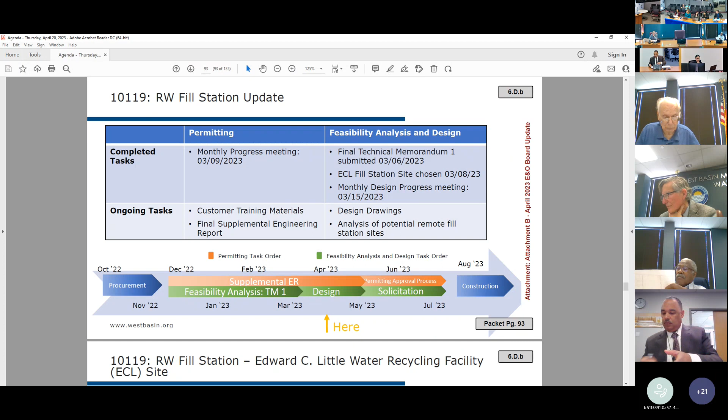So far, just to remind you, this fill station has two components: the permitting component, which is mostly composed of submitting a supplemental engineering report to get regulatory approval to operate the fill station, and the second component, which is the feasibility analysis and design.

This past month and a half, we've worked with our consultants, Woodard and Curran, on a monthly progress meeting, and they are currently working on providing the final supplemental engineering report. In order for them to do so, we've also been drafting the customer training materials. For the feasibility analysis and design components, we received the final technical memorandum 1 from our consultant Tetra Tech in early March.

As a staff and team, we were able to get together and decide upon the ECL fill station site right after, and we also had a progress meeting with the same consultants. They are currently working on the 100% design drawings, and we just received the 70% design drawings last week.

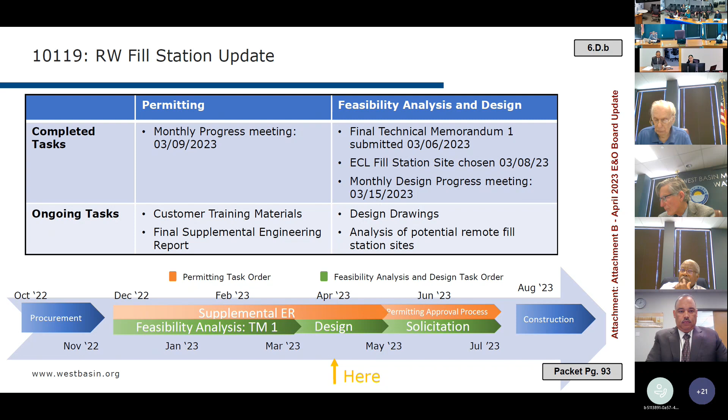And internally, we are also working on the analysis of the potential remote fill station site. On packet page 94, I could go into a little more detail about why we chose the site that we did at ECL.

Based on the technical memorandum 1 recommendation provided by Tetra Tech, we wanted to go with location 3, which is located in the east parking lot of the visitor center, shown in the picture on your left. With this location, we are deciding to connect to the existing irrigation system via a 1-inch quick coupler valve. The main reason for this is based on the board's urgent request to implement this project quickly, so we're going with this specific site.

It is the lowest cost, because the least amount of equipment is needed, and it also minimizes the schedule since not much construction is required. Another reason for selecting the site is because it is very close to the restrooms, allowing ease of access for customers as well as staff operating the fill station. Again, since it requires a very simple design, it minimizes the equipment needed.

We are going to utilize existing vendors to purchase that equipment. This site also allows for more space, so in the future, if we want to add another hose dispenser, or even expand into a new recycled water meter with a higher flow rate, there's opportunity to do that as well.

So the overall cost to implement the fill station at this site is about $4,500, and that includes the quick coupler, a sub meter, a hose cabinet, and some contingency.

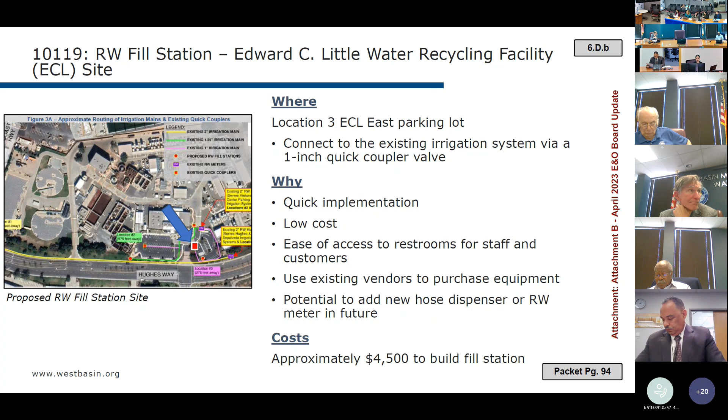On packet page 95, you will see the 70% design drawings. These just came in, so I wanted to quickly show you that Tetra Tech has been working on them and was able to submit it, so we are in the process of reviewing. You can see on the left where that quick coupler will be located. It is 1-inch, and provides about 15 gallons per minute flow rate.

You'll also see that a new recycled water sign will have to go in adjacent to it, which is a regulatory requirement. We will also use the adjacent customer parking spots for the fill station customers. On the right, you see details that were provided, mostly regarding the warnings for recycled water signs, as well as how the existing coupler currently looks.

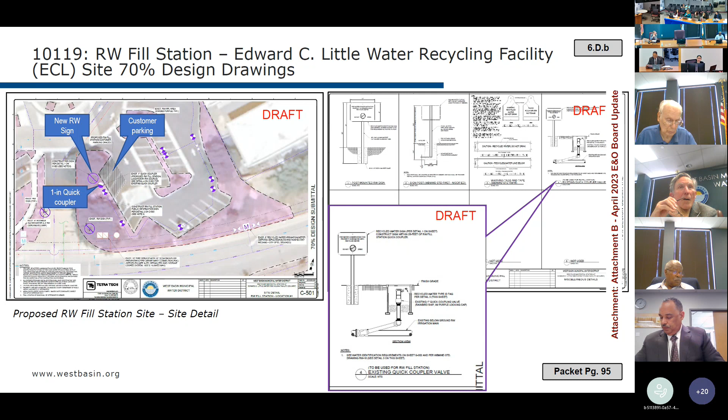So on packet page 96, you will see the customer training materials. As I mentioned, these are required, and we need each customer to either read, sign, or acknowledge that they have read through all of these different documents.

I wanted to highlight the documents we've been working on, starting with the user agreement application. That is basically a document that has the customer acknowledge and become aware of the risks they are taking when they use this fill station water, shown on the right.

The 'What to Know About Recycled Water' fact sheet also provides further information about the fill station program, who's eligible, the procedures needed to use the fill station, and the understanding that the water is very heavy, so they need to acknowledge that the vehicle they're bringing in will have a lot of added weight.

Participant training is another element to provide further safety guidance on what recycled water is and how to properly and safely handle it, and where it can be used. Lastly, recycled water identification stickers need to go on all the containers carrying recycled water, shown on the screen, so that those containers are properly marked.

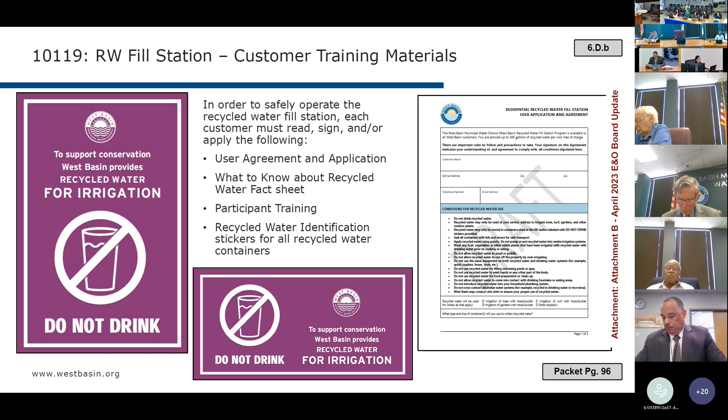On the next page, you'll see the other component of this project: potentially looking at another remote site to put a fill station somewhere within our customer service area. To determine the most feasible site, we prepared an analysis looking at potential sites located in the cities of Carson, Gardena, Inglewood, Lawndale, Torrance, and Palos Verdes Estates. So far we've identified 25 sites.

For each of these sites, we developed criteria to analyze the potential feasibility to host a site. You'll see the different criteria listed, which identify the location - whether or not it's in the district service area, if it's a West Basin facility, and also who the water purveyor is, because that's important when we want to.

The other criteria is site accessibility, so we're looking at how close to our existing distribution system it's located. I was able to work with our GIS staff to map out our entire existing distribution system, shown in the purple line in the image, and also create a buffer zone about 300 feet to know how far out we could potentially connect to.

We also want to look at whether or not that site is fenced or open, and then if there's room for parking and queuing, so if there are customers interested and there's a lot at one time, we want to make sure they're safe to queue. And then we also want to see restroom accessibility, if there's any available for the public to use.

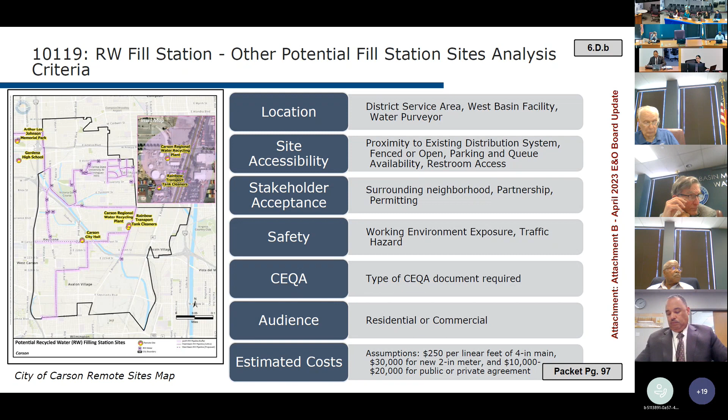To help you better understand this, this is a map of the city of Carson, and we highlighted about 3 potential sites there. But on the next packet, page 98, I can walk you through a quick example of one of the sites we've looked at—that is in the city of Torrance, our Torrance Booster Pump Station site.

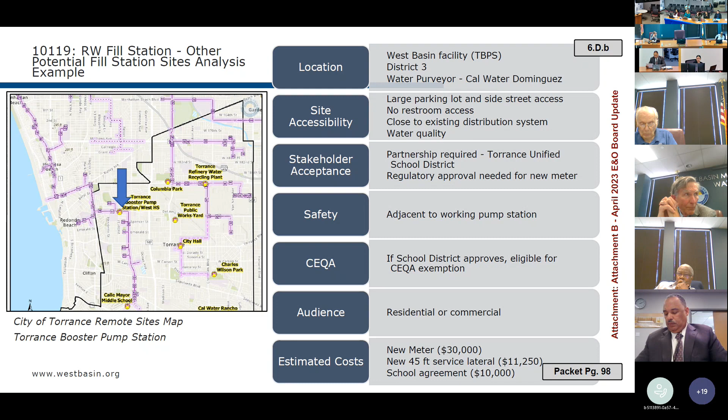Lastly, we estimated costs, knowing that a new meter would have to be implemented, as well as the lateral and the school at this specific site. On the next slide, you'll see that we are looking forward to submitting our supplemental ER next month.

We are also working with Tetra Tech to develop 100% design drawings. Per Division of Drinking Water's recommendation, they told us to notify our customer retailers of this upcoming fill station, so they're aware we're opening up to all of our customers, which will enhance their options.

Lastly, we are continuing to seek partnership opportunities for the remote fill station sites. In June, we are hoping to go out for construction solicitation. The caveat is, with the simple design we currently have, we may not need to go out for bid, because we can use our existing vendors to purchase all the equipment and essentially assemble it.

Lastly, in July, depending on when we get regulatory approval—we're hoping it's 2 to 3 months—we'll get approval from the Water Resources Control Board, Division of Drinking Water, the LA Regional Water Quality Control Board, and lastly we'll work with the Department of Public Health to get that. So in July, we're hoping to construct as well as operate.

And with that, that concludes my presentation on this update. If you have any questions, I'm happy to answer them. Well, thank you very much.

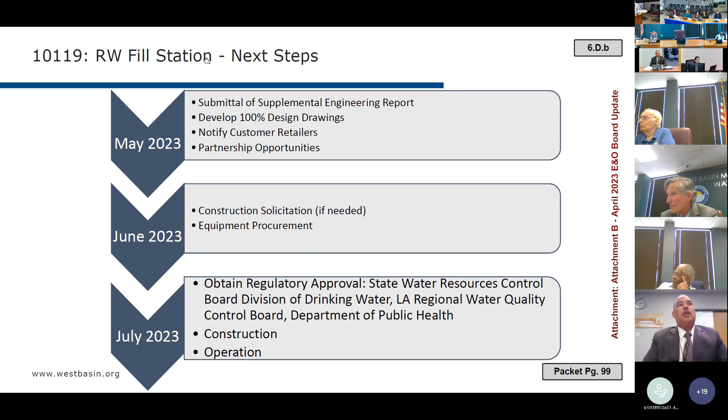If I may add—yes, thank you, Camille, for doing such a great job with this presentation. I think Camille did a great job walking through one of the sites being evaluated, other than ECL. But there's a range of sites we're looking at, not just that one, because we want to make sure all the eligibility and evaluation criteria are compared so we select the best of the sites. It just so happens the one Camille picked was one of the 3 locations the committee had asked us to look into, and that's perhaps why you picked that one to elaborate on.

To clarify, we did look at 3 sites, including Lago Seco Park, Torrance Refinery, and the JMM Carson plant—those were the 3 sites indicated by the board last fall. Torrance Booster was an additional one because it's a West Basin facility we wanted to look at. Oh, that is not the Lago Seco Park? No, I thought that was the one. Okay, well, we're looking at a range of sites—within cities, buildings, parks, and schools mostly.

Basically, we want to collaborate on the best way to implement this. So is it safe to say we'll come back to the committee with a set of recommendations once the evaluation of all the sites has been completed? Okay.

Dr. Williams: Nothing's ever easy. No, it's not. We thought we would have been done a long time ago with this.

I have nothing more to say, but if you're doing the right thing, that's because we don't want to pay for it for other reasons down the road. Thank you, that's all I have.

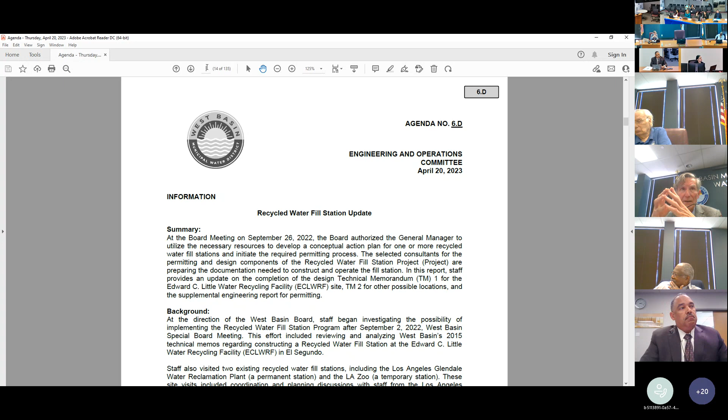Not expanding this. And the other thing is, let's be honest, this is an opportunity for the community to use it. A lot of the users will probably be more of the commercial landscape companies that service industrial commercial facilities, as well as the larger residential complexes and homeowner associations. There will be some private parties that will also come, and they will more than likely come on the weekends to use it. But the bigger users are gonna be the commercial landscaping companies.

So I don't think that we have that big a population of users, so the investment in it ought to be measured. We ought to be really thinking about that, and maybe we look at how much usage we get at the first facility we would install at the Ed.C. Little, which is pretty straightforward installation. And if there's a tremendous demand, then obviously we can revisit that, but otherwise I think we ought to be very measured in looking at how much money we're gonna spend providing these facilities.

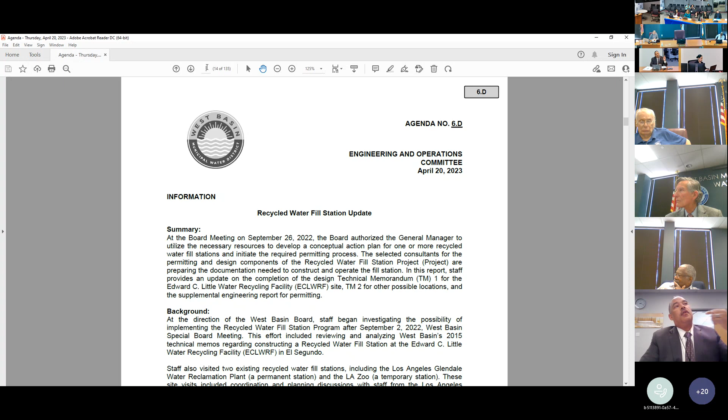That makes sense. We could see how ECL performs, and if you get an overwhelming response, then maybe the board would like to make it more convenient depending on the geographic reach. See where the demand is coming from. Is it coming from the South Bay? Is it coming from the easterly part of the district? Is it coming from the north part of the district? And then we can be more focused.

Chris, thank you for all of that feedback. All right, well, thank you very much.

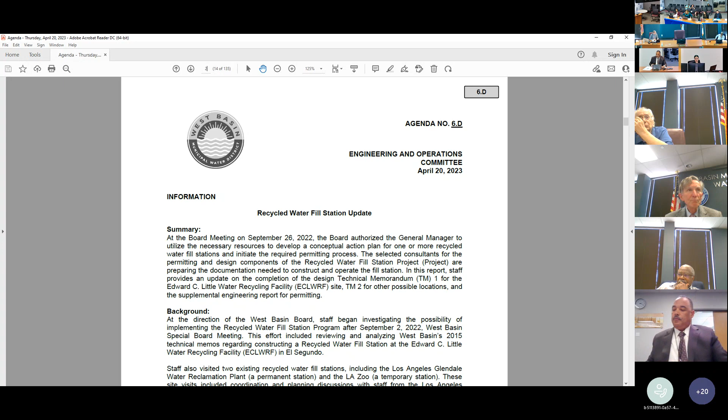Moving on, then our next report is the monthly operations report. We'll go back to Uzi for that report. So Uzi, please.

Highlights on here, we changed the format a little of the memo, so I welcome everybody who's gonna look at some of the operational summary from this last month. Barrier production was kept down. We have ramped it up, but there was between 4 to 5 MGD due to some of the input water quality issues we had and membrane replacement. I'm sorry, page 100 is a large part of the issue.

So from the beginning, page 100 is where I'm starting on the summary, packet page 1. So with these highlighted bullets, we did just get a call, and I recognize this as a reflection back. We got a call yesterday, which we appreciate that there's communication from Hyperion. They lost their oxygen system. They did prepare us that we would see an upset.

Now we're prepared a little more. So we do have thresholds of when we start bringing down certain operations to protect the equipment, how we operate, notify the county. So far, we're doing okay. It's hovering like 20 NTU. We talked to them as well today, but I bring that up because now we have a protocol.

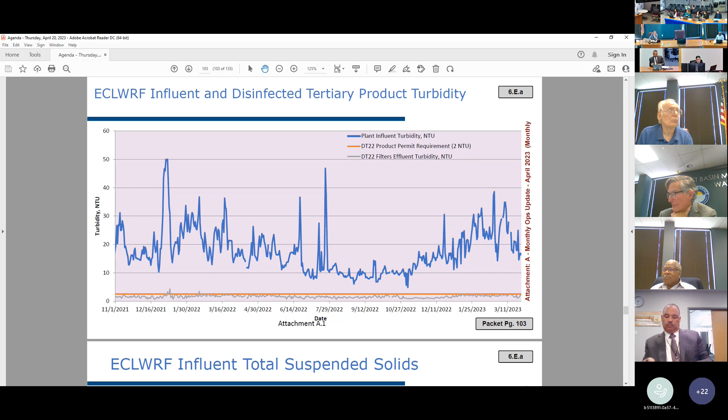Okay, just one of the first—and if I may, we also have the report that was requested for potable sales deliveries and recycled water deliveries. It's also attached. Okay, thank you. Follows what is in. Yep, thank you.

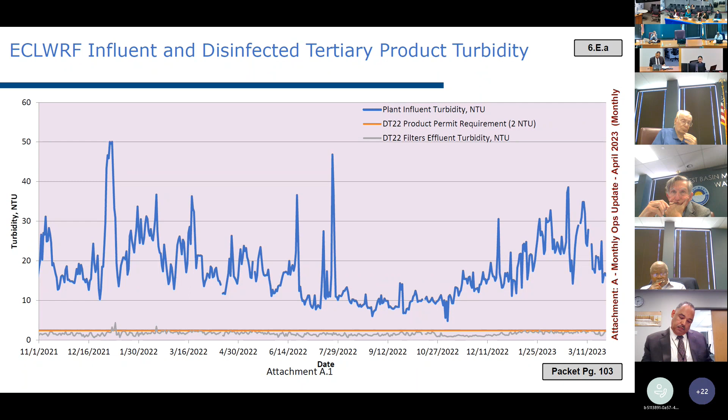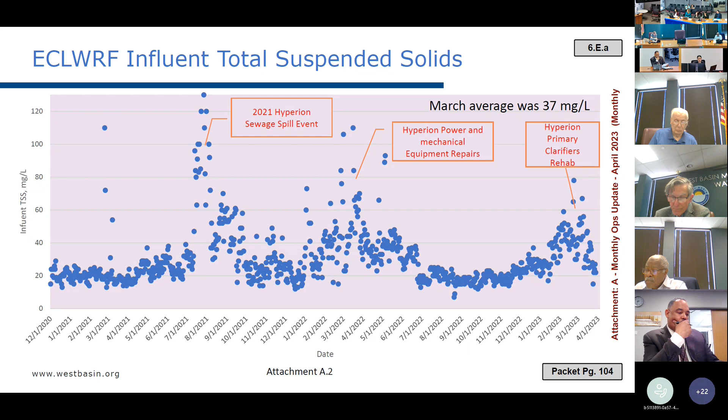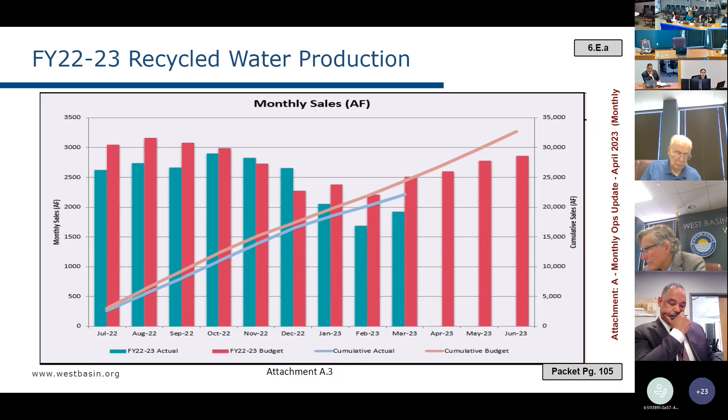This is overall our recycled water production through the month of March. The next page is the chart that summarizes the individual major customers' production.

On page 106, we're about 10% below budget. The main contributor is Carson Barrier, as we mentioned. We really need to replace the baseline membranes, which I'll be bringing to the board shortly.

Torrance Refinery is the other underperformer, maybe because we had to supplement a lot of potable water through a couple of times during March. At that facility, I had a board member approve procuring membranes, because without replacement of the membranes, we may be at risk of shutting down altogether of producing recycled water.

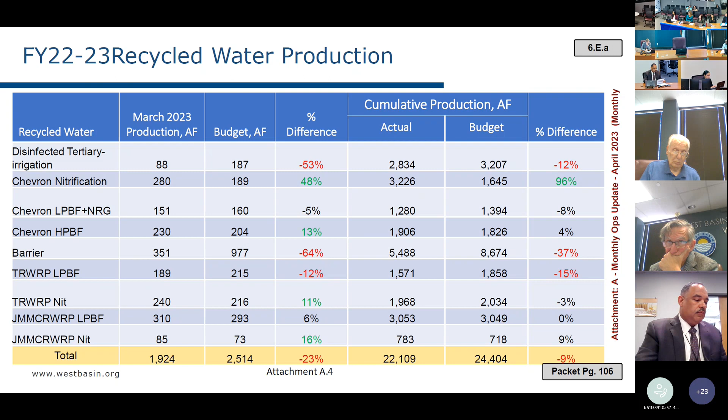Here is just a more detailed comparison of recycled water sales in March compared to water sales to last fiscal year.

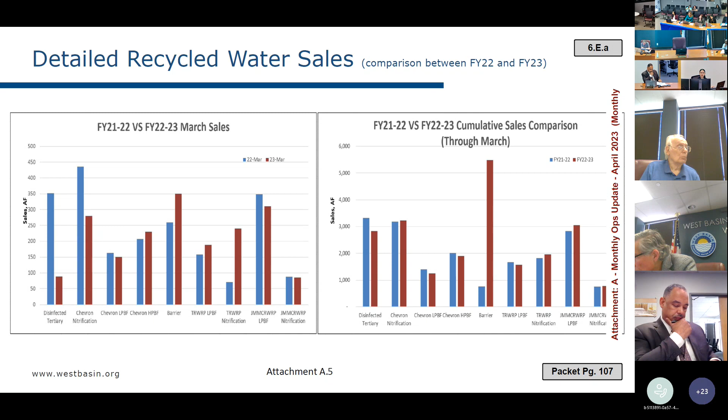On to the monthly maintenance activity. As Lucy mentioned, we're doing a lot of cleaning up and catching up work at the plant after the whole year and a half of challenges due to the 2021 upset.

So we're cleaning up the pre-treatment, repairing and replacing motors, and that's at ECL. At JMM, one of our satellites, the feed pumps are being impacted, so you see the maintenance staff reassembling our pumps for that facility.

At the plant, the maintenance shop is also constantly doing sonic testing and membrane testing at satellites, and troubleshooting other aging infrastructure as needed.

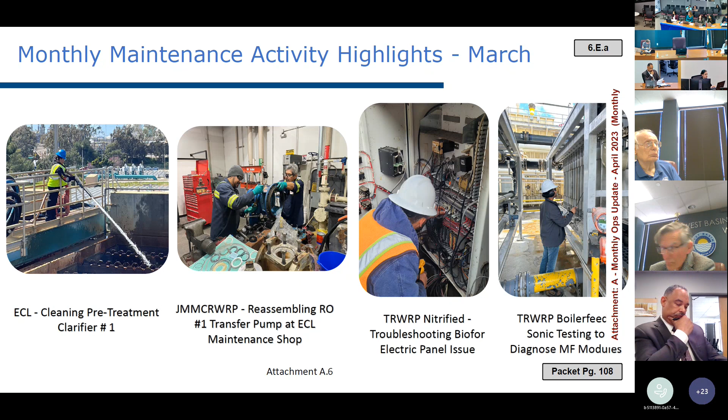Any questions, Susie will be able to reply.

10, that's just water customer service. For the purveyor program, we continue with the sampling effort.

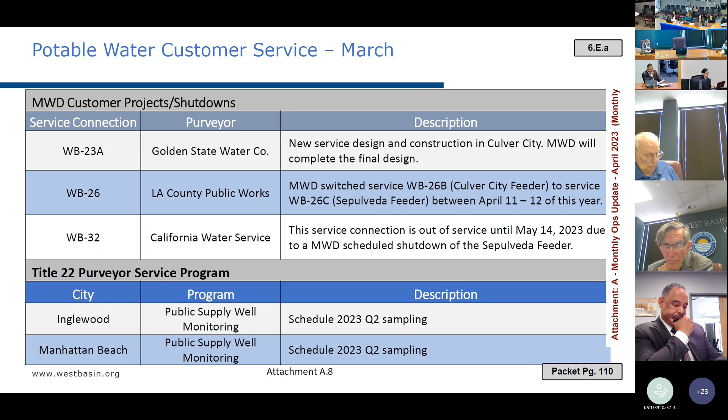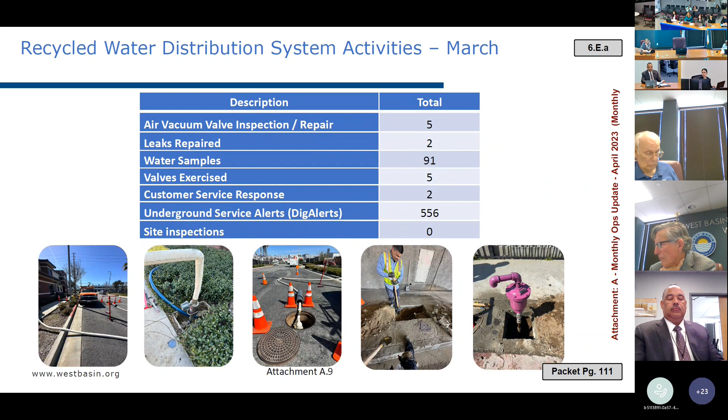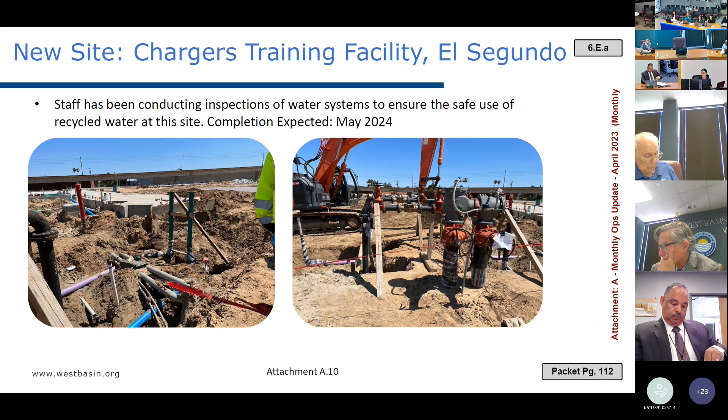With that, that's our normal reporting. If you want to go to the potable, that is all sales, and the potable water supplement usages begins on page 20. So let me know if you have any questions, I'll be happy to answer.

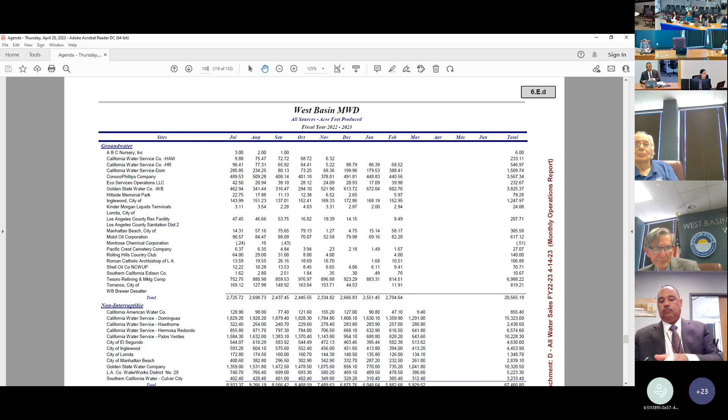Okay, thank you. Greg, do you have any questions? No, thank you. Mr. Deere? Nope, thank you. Director Gray, do you have any questions? Okay, hearing none, thank you very much.

I appreciate the production and sales data very much. Maybe next month we can go into that a little bit more in terms of comparison of where we're at, and looking at some of the recycled water sites and how much recycled water is being used versus how much potable water is being used, because that seems to shift quite a bit from month to month.

Just looking ahead from May, I believe the E&O is on May 10th. On finance, normally we'll get the sales report till May 11th or 12th, so we might not have updated information, but I'll be glad to go over the same numbers here.

Well, maybe we can move the committee meeting so that it would be more appropriate for that information, but we'll decide on that. Thank you very much, appreciate all the data that you put together. I know it was done at the last minute.

Okay, so moving on, monthly engineering report. Mr. General Manager: Wendell Johnson, our engineering manager, will provide that report. So Wendell, good afternoon, Chairman and members of the board.

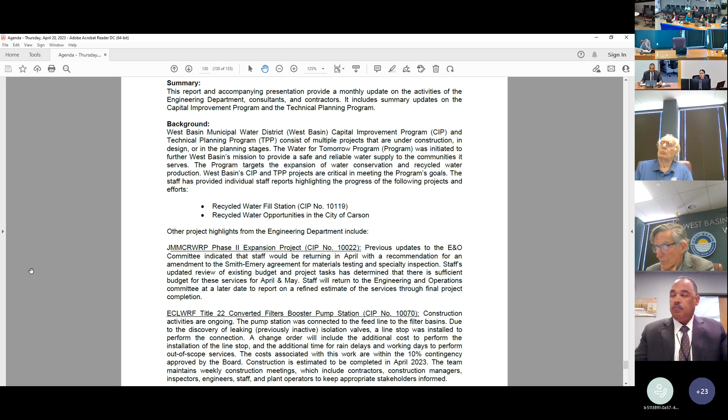We started this project about 2 weeks ago, and it involves replacement of the filter cloths. The committee approved this project probably about 2 or 3 months ago, and we've already started to realize quite an improvement in the density of the solids coming off of the press. We've gone from 15% to around 30% already, so we're already receiving a little bit of the savings.

The project itself is on schedule. We're scheduled to complete 1 press by the end of this week, and we hope to get started on the second press on Monday. It took us about 14 days, 10 actual work days, to get through one press, and our expectation is to be done with this project in about 2 weeks.

But there's always a glitch, okay. We haven't received the delivery yet of our second batch of cloths, but we're expecting them to be delivered on Friday, so hopefully those will come in and we'll be able to continue through with that project.

I'm excited about the denser solid cakes coming off of that press, because it's substantially reducing our cost of haulage as well as improving the recirculation of solids throughout the system. So I think those were some dollars that were well spent in that particular area, validating the business case. Yeah, I've never been so excited about solids.